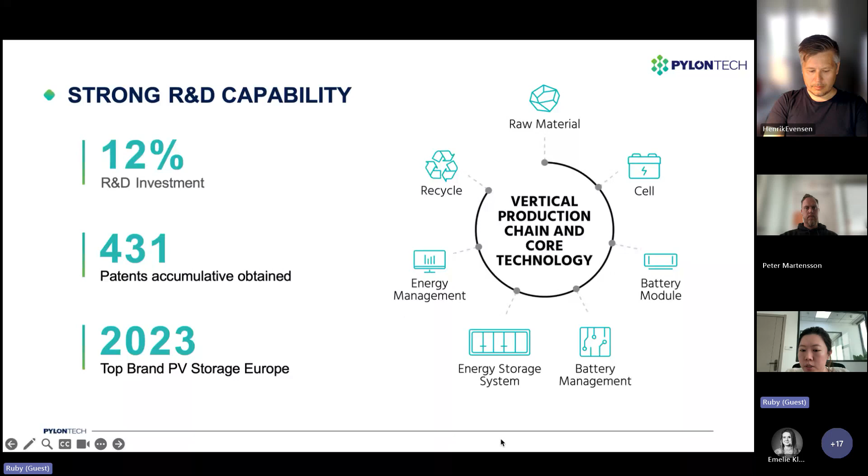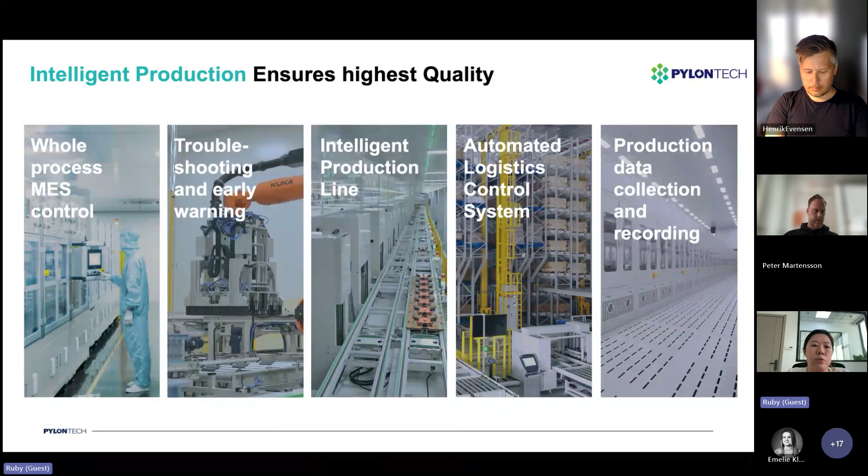Just a quick glimpse of our production process. From control, quality control, testing control, and battery cell production, we now use the most advanced equipment to produce all the solutions and all the cells.

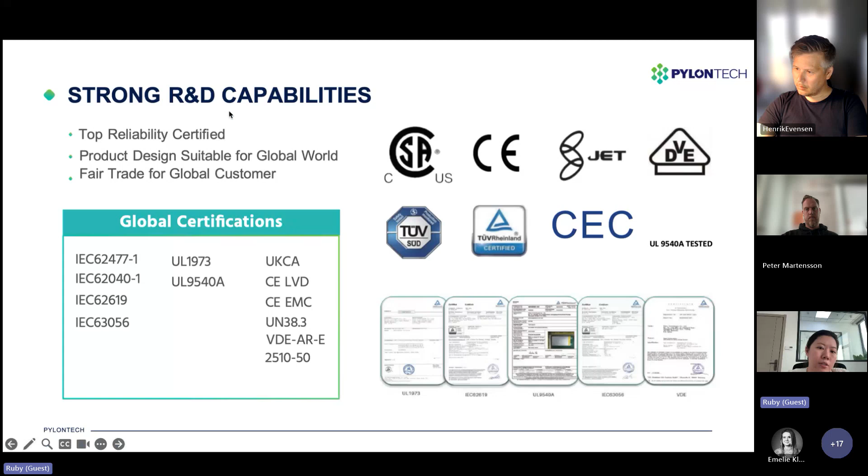We have the most certifications in the world. If you are working with a Pylontech battery, you never need to worry about certification - we have certificates from the cells level to the system level.

For the EU we have different branch offices for after-sales and pre-sales technical support. In markets like Sweden, we have cooperated with Solis, who will be the main contact window for all Solis plus Pylontech battery solutions.

So let's jump to the product that Solis and KP would like to push to the market. For the residential side, this product, Force H3, is actually a new Pylontech product launched in 2022.

We started delivering it in 2023. Force H3 is actually the most dense residential battery in the world in the whole industry right now, with 5.12 kilowatt hour each module, in each string.

On the top you have the BMS, and below you have the battery. Each string has a maximum of 35 kilowatt hours, meaning you can stack a maximum of 7 modules. On top of that, by using combiners you can parallel multiple battery groups - a maximum of 6 groups - giving you 215 kilowatt hour capacity.

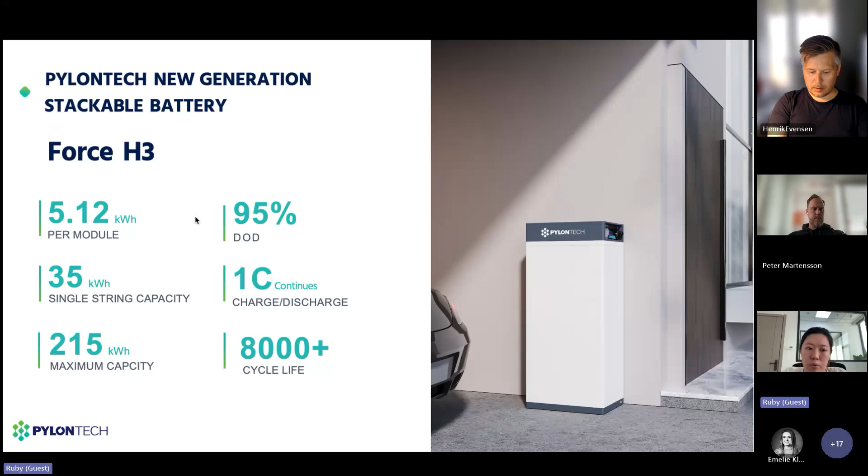From Pylontech's cycle life promise, a few years ago we only promised 5,000 cycles, afterwards we increased to 6,000, and now we provide 8,000 cycles - all based on practical installation and realistic testing.

Here's a quick show of how to install the battery itself. It's very easy to install - you just stack one module on another, with a fast contact between each module, then commission it with the inverter, which is even easier - just a simple test and setting from the inverter side.

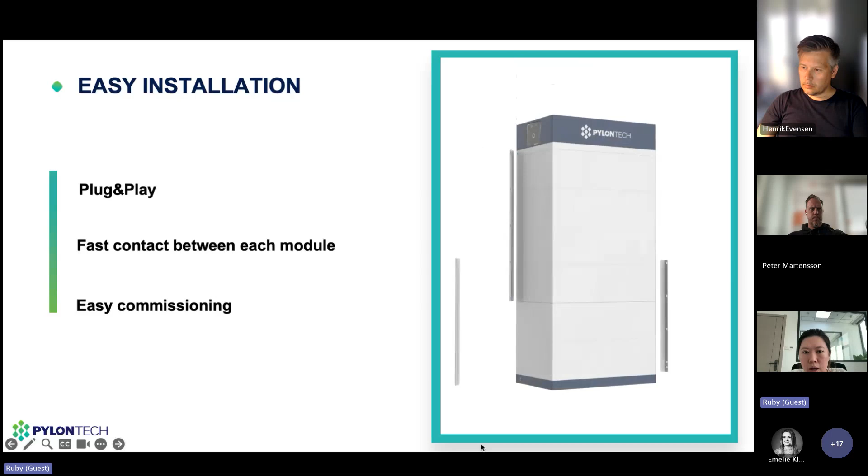Another thing about battery is efficiency. In most current solution providers, they have battery cells inside each battery module, one part being battery cells and another part being DC-DC modules. The reason they do it is first to control their supply chain, because they don't have the battery cells produced by themselves, so if they have multiple battery cell providers, they don't cause problems for their whole system.

There's also another reason. For us, if you compare it, we don't have any DC-DC inside, we only use cells to do series cell connection to level up the voltage. That means we don't have extra power electronics inside to affect efficiency loss. So for this round trip battery efficiency, we can reach 96% efficiency level.

That brings the advantage when it comes to, for example, energy trading or frequency services.

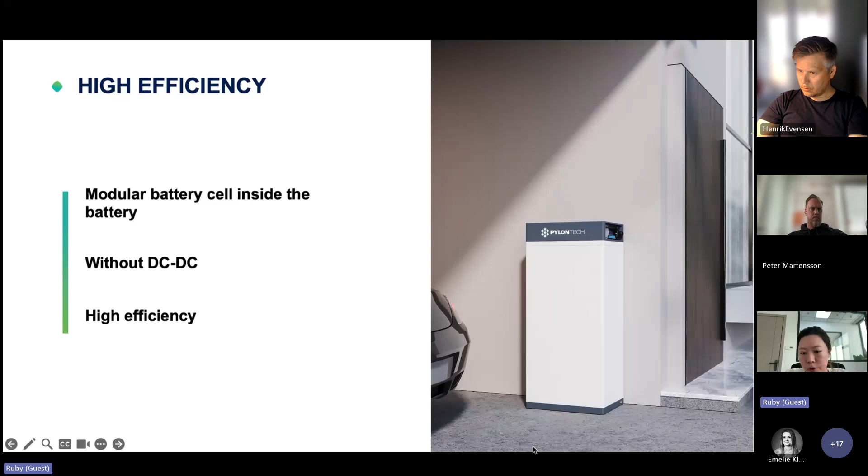And easy expansion. That means, for example, if you install 2 battery modules in year 1, you have 10 kilowatt hour capacity, but in year 2 or year 3 you would like to extend your capacity. The first option, you can just insert a battery module inside the previous system. All you need to do is charge the previous system, the already installed system, to full, and insert this one battery module in. That's easy, and our BMS, designed by us, will do all the balancing job.

This is one advantage because Pylontech does our own cells, so the inside modules are always Pylontech cells, and the BMS is made by Pylontech. That means Pylontech does all the job, which gives no problem for future expansion.

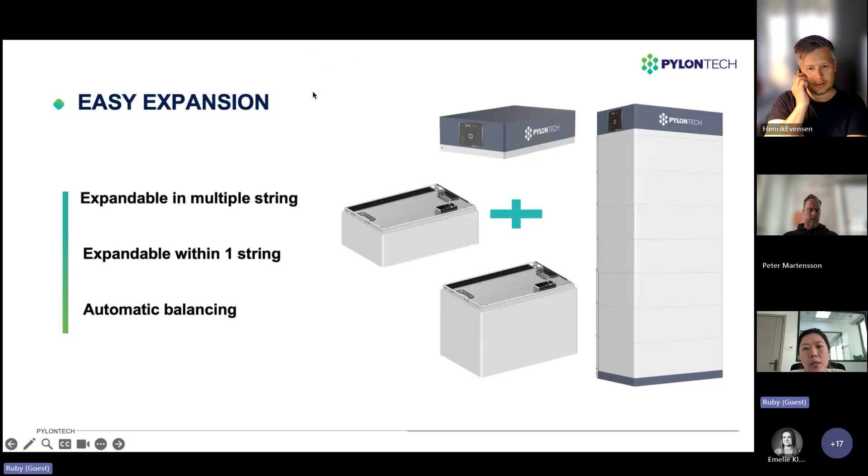Speaking of expansion in one string, if you would like more capacity, you can always have the option to use a combiner to combine different strings. As mentioned, maximum you can do 6 strings.

Another thing is high compatibility. We and Solis have a very deep cooperation, not only in the Sweden market but the global market, with already 8 years of cooperation experience, which demonstrates the strength of Solis and Pylontech. Pylontech also works with 80 inverter companies that are all compatible with Pylontech battery, from which you can choose, for example, Sungrow, SMA, Kostal, or even GoodWe.

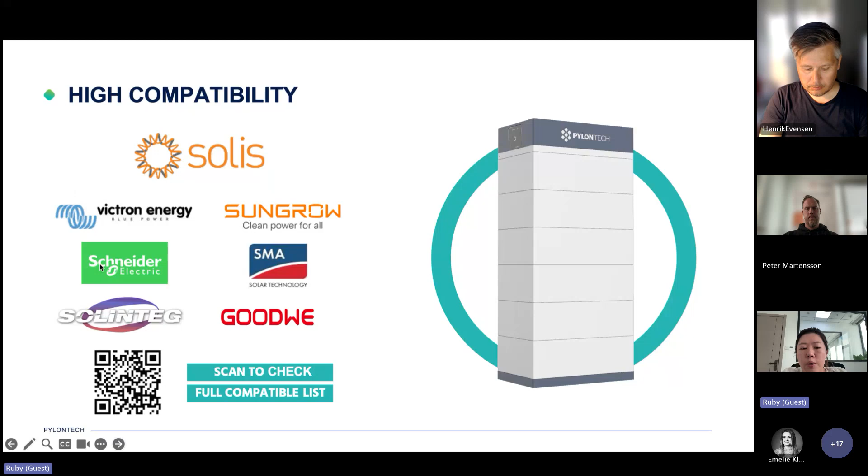And if you would like larger inverters, you for sure have Solis 50K inverters, and later on there may be more. You can always feel free to scan here to acquire the newest compatibility list.

That's it for the battery residential side. But we are also working and cooperating with KP and Solis to launch commercial side batteries, and the first one is our Pylontech own solution. We have this light commercial one, 100 kilowatt, 104 kilowatt hour system that plays with the frequency, and that can only be connected with the grid, so we don't have any output connected with PV.

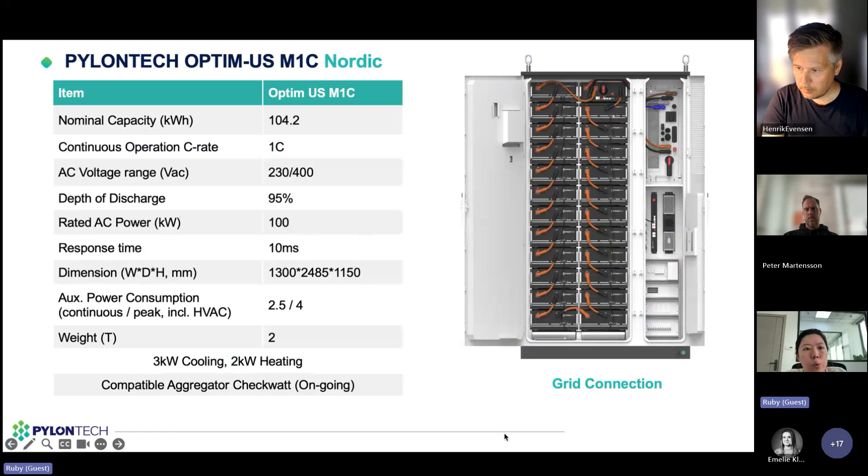And if you would like to connect with PV, we for sure have a solution with Solis. We have 1 or 2 inverters hanging on the rear side of the battery cabinet, which reduces the heating problem, and also the Solis hybrid inverter has IP66, which is enough for the Swedish environment.

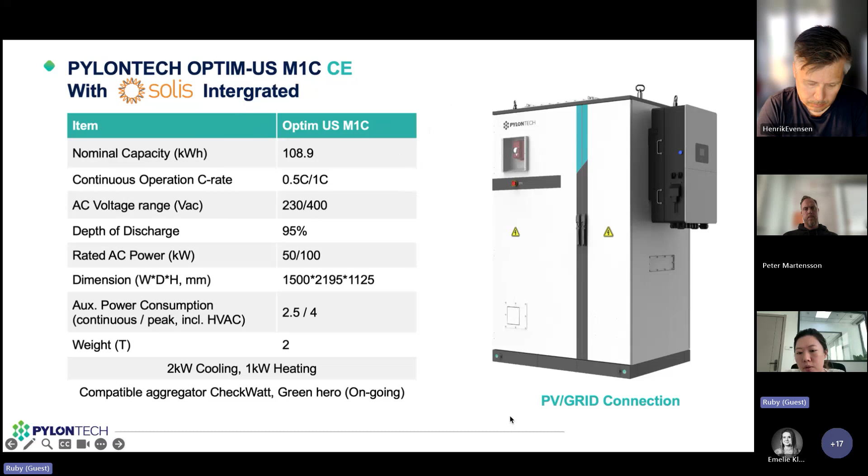For this cabinet, with a 50K hybrid inverter, we could do 50 kilowatt and 108 kilowatt hour system. You're also free to have 2 hybrid inverters hanging on both sides of the cabinet, which brings you 100 kilowatt and 108 kilowatt hour system. For larger systems, we also have solutions, for example 1 megawatt hour or 2 megawatt hour — please send the inquiry to KP.

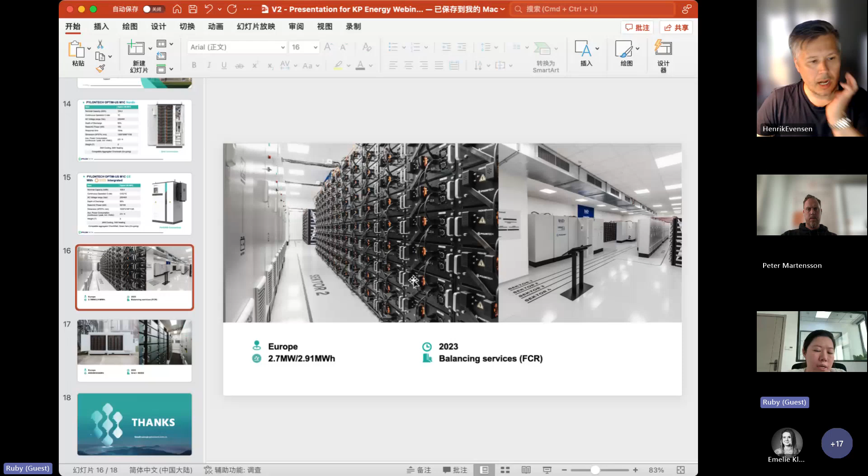So thank you. We have 2 more case studies just for you to check. Then, thank you.